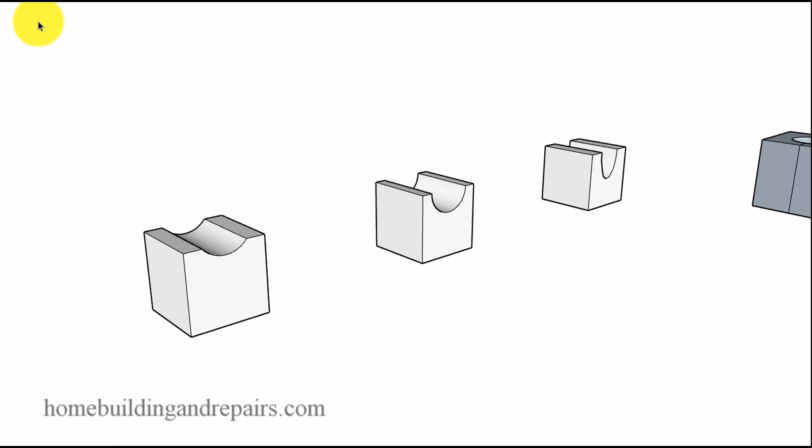Here's another thing you can do with a framing square, and I don't know if you would use this while building houses, but I am going to make the video anyway, so let's go ahead and get started. I wanted to point out that if you have a semicircle, half of a circle, that's basically what this video would be used for, and the circle or the curve is too shallow, like we're looking at here, then only one side of the framing square and the point here will touch, but we will not have both sides and the point touching, as you can see here.

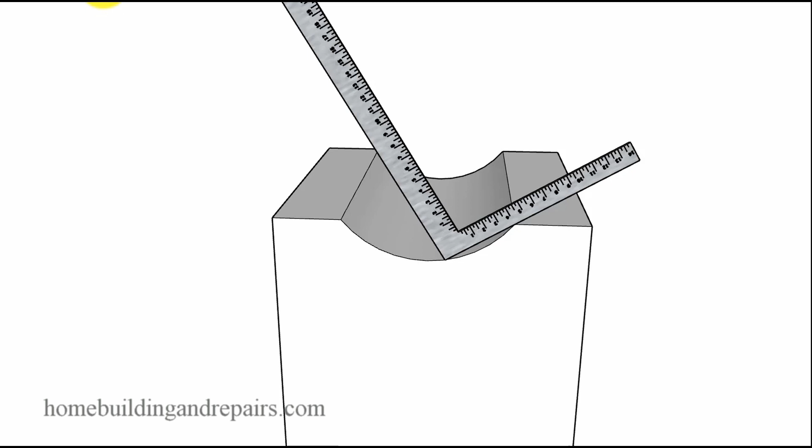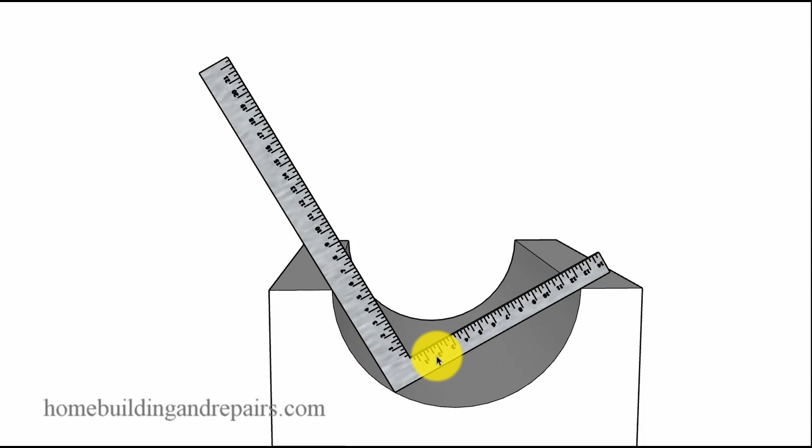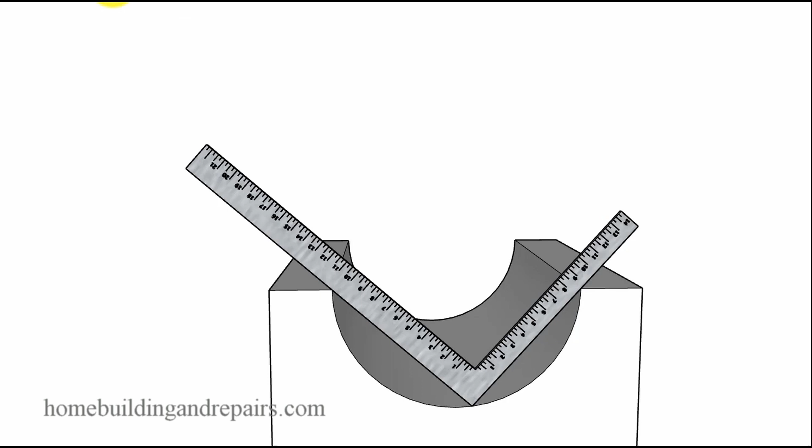Now, if we do have a semicircle, a half of a circle, then all three of these points will touch. And again, like I said, I don't know if you would use something like this to check columns, or I would imagine the same would be true on the inside. That'll be another video later. But of course, this is a curve for something like this, and we're using the outside of the framing square. And you can see here where any position that we have it in is going to be touching all 3 points on the framing square.

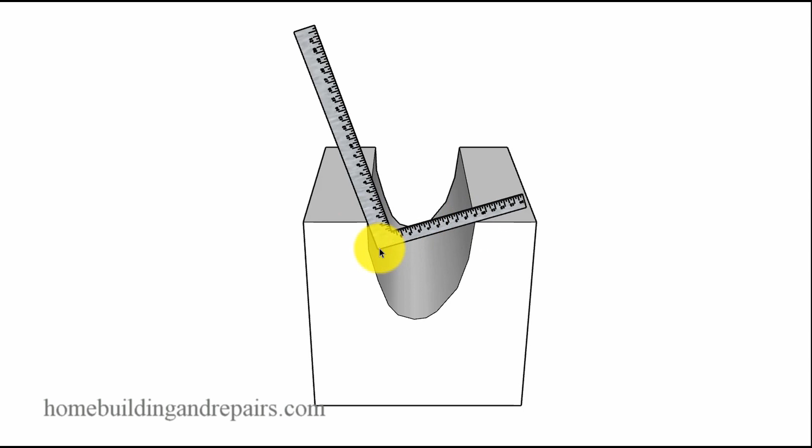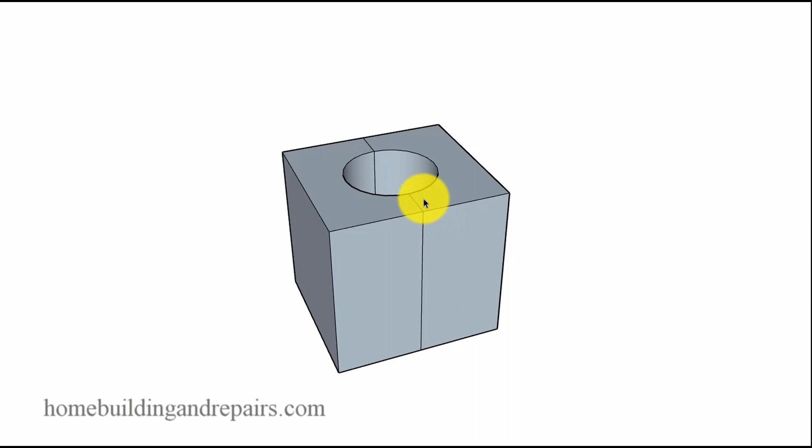If the circle or curve is too deep, then you will have the 2 sides touching, but you won't have the point here touching. As we can see here, ain't gonna happen. So, like I said, don't know what you would use this for. Apparently it was used for making and double checking the cast for something that would be used to make metal round tubes or something like that. I guess that's what that was used for. In carpentry or home building, I would imagine it could be used for checking round surfaces, or something like a form that would need to be a circular shape. So again, just wanted to share it.

Don't shoot the messenger. I am planning on making quite a few videos about what you can do with a framing square. I thought it was interesting, and I'll probably say this throughout the videos, that I got a book years ago in the early 80s, and it was all the stuff you could do with a framing square. And again, it might be a book you might be interested in looking up.